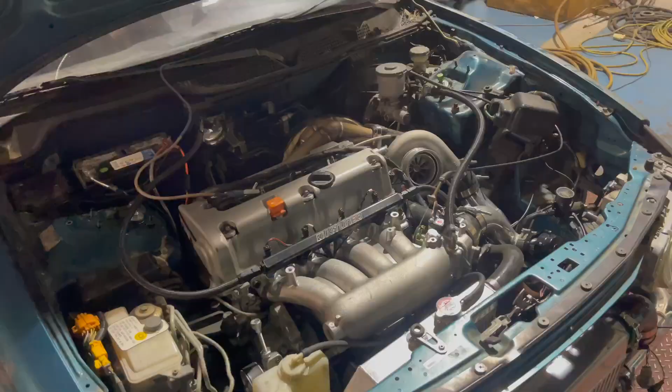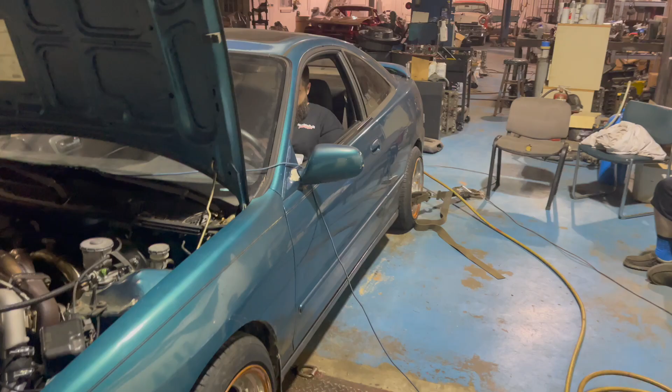It does have pistons and rods that we put on the 85. It has a Bull Boost turbo, 1300cc injectors, Walbro 450 in-tank. Like I said, the rest of it's my budget turbo kit: intercooler, downpipe, manifold, wastegate, charge piping. Chris built the motor and assembled the car. I just built the turbo kit and he's gonna be on the dyno.

And then we got Stumpy over here with his popping-out-second-gear transmission, and we're gonna be dynoing that. And we're gonna finally put Milkshake on the dyno.

So as every car gets on the dyno, I'll be talking about what car has what, and every motor's pretty much set up different. Milkshake and the Integra both have built K20 motors. Stumpy has a stock K24 in there, on a Jack Spania 3584 RS.

Milkshake's on a... what the hell is that turbo? VS 6870. So we're gonna be trying that turbo out. It drives really damn good on the street, the car almost feels like a motor car. This turbo is a Bull Boost turbo.

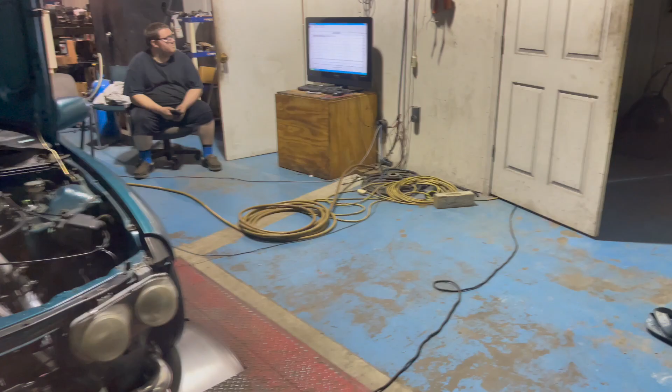Got a little bit lit there at the end. It must sound like a little creep at the top.

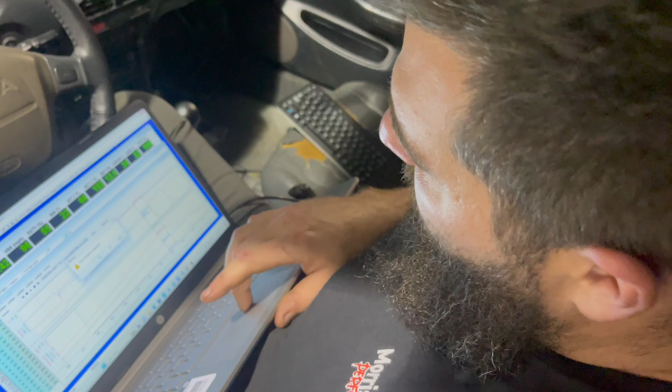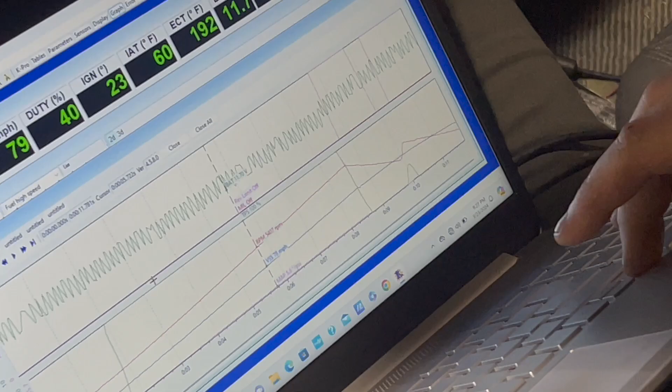Chris, explain to everyone what's going on. Bro, let's talk about it. Voltage. What is that, like your heartbeat? Oh no, you're alive. You fucks.

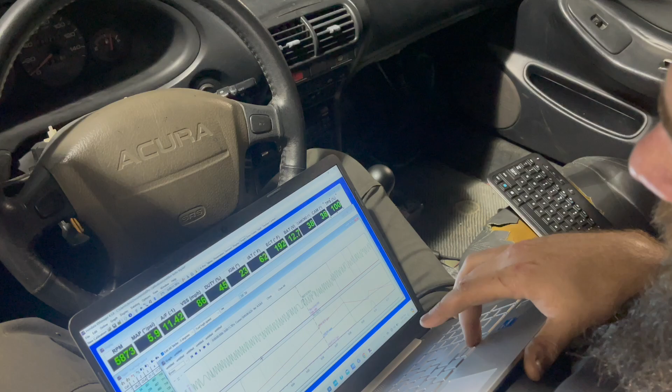Everything else looked good, but voltage is slowly starting to tank on us. So either alternator — I'm hoping not ECU. I feel like wiring's fine, it didn't do this before. So possibly alternator. Yeah, so that's the second tune that I don't get to do, and this is a full build by me, so I wanted to make power.

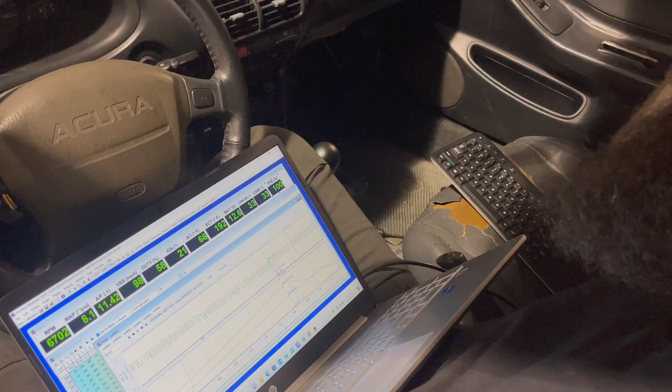Sometimes you'll have that on the big jobs. Yeah, so I'm striking out again.

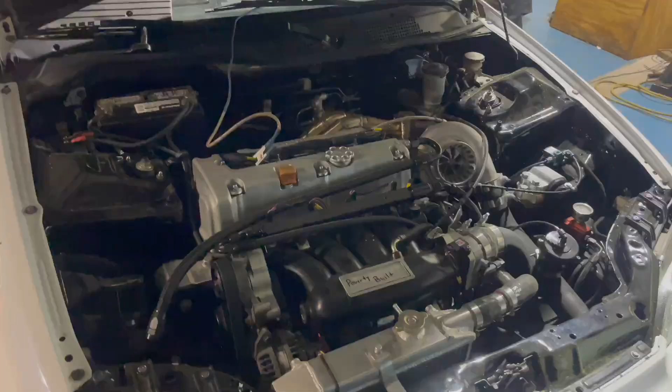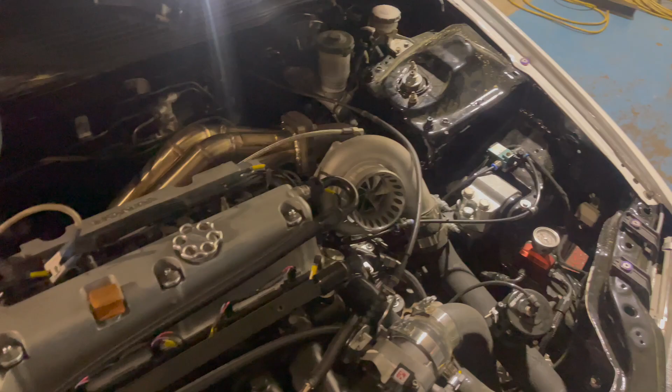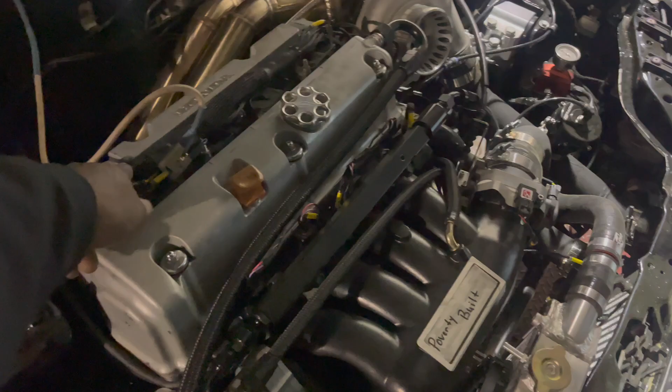Oh, action clutch, element trans. Still got CRV diff in the rear. We just gotta hook the driveshaft up after we get up on the dyno, and that's it. So let's get to tuning.

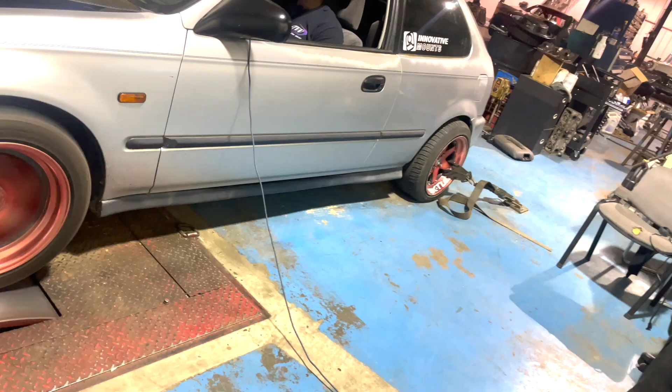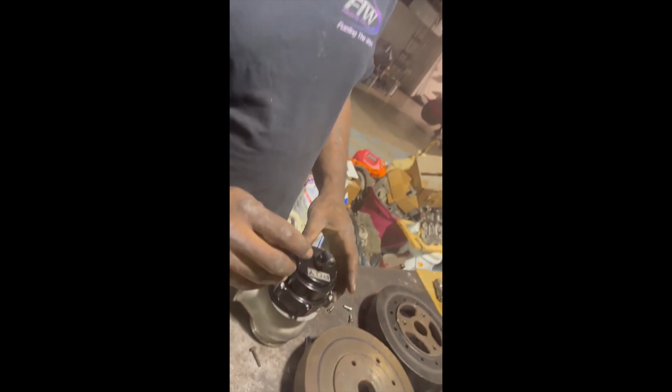We got Stumpy on the dyno. We got Phil over here. What you doing, guy? Stumpy tried to save $40, and it's costing us time.

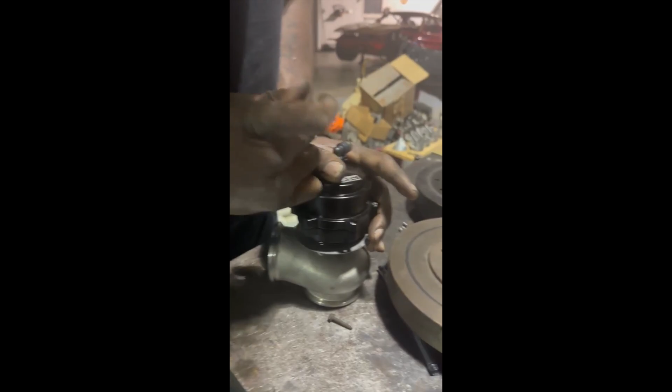It's a PQI wastegate that doesn't work. What was going on, how was it not working? You're about to see, we're about to show the people. He's gonna walk over there to a trash can and just let it fall, after he gets the fittings off.

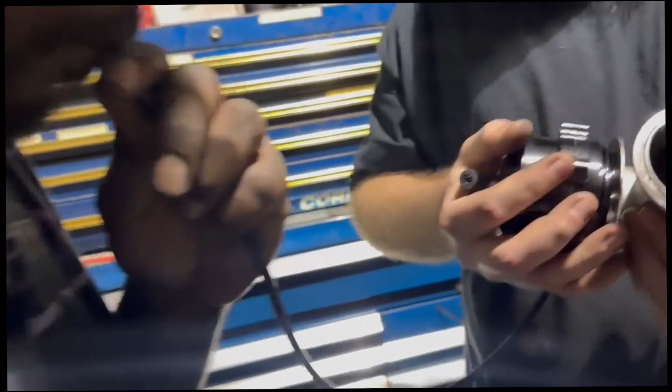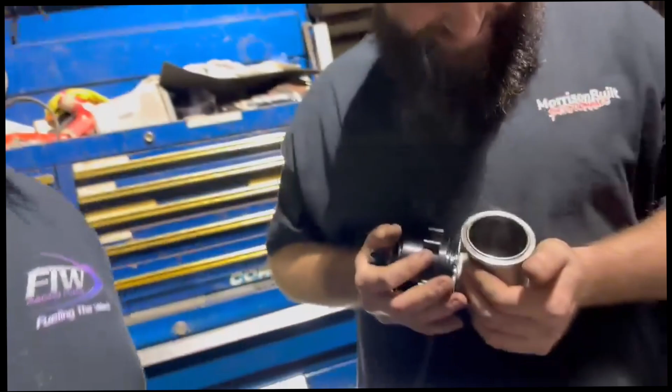Are you recording this in landscape and not... Just stop it, we gotta test out this gate we got here. There we go. Got a vape trick. Oh no. Smoke test. $22 smoke tester, that's terrible.

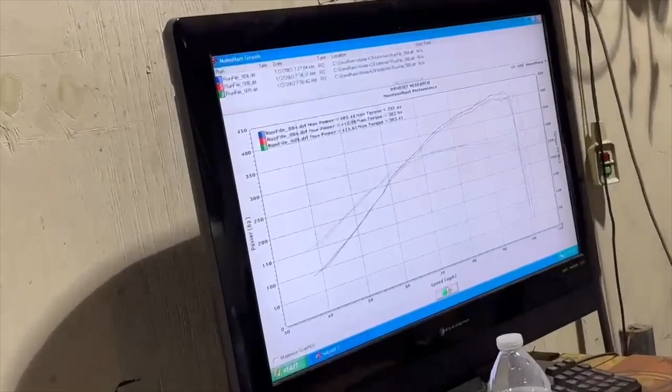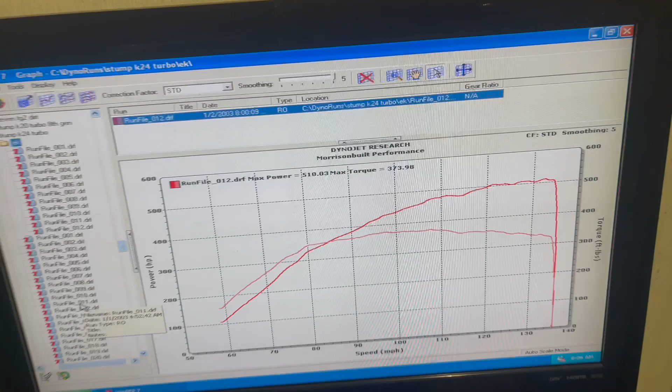All right guys, so we got done with Stumpy's car. Final numbers are 510 on 17 pounds. This is a fourth gear pull. How the hell is it going 135 in fourth?

So you sure this is an EK? Nah, you sure it's not an EP3 trans? Small tire, 195, bro. Oh, I mean yeah, I guess we'll just find out when we go to the track.

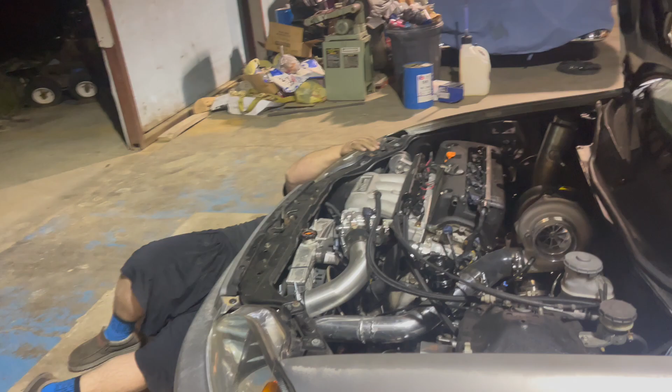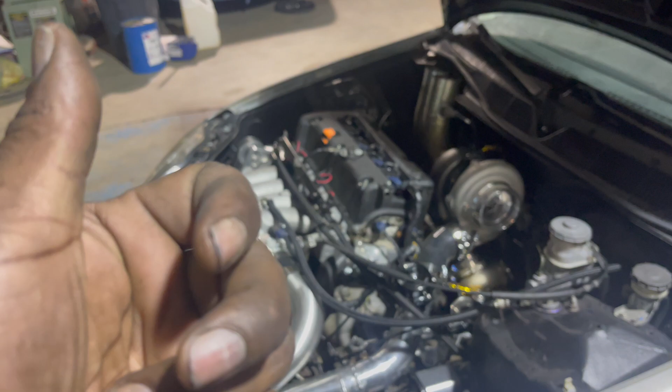But it's 1:40 in the morning, we're about to close up and head back to the shop. 24 and a half should go up, 150 at the back. Yeah, we're not going to sleep tonight. We still got to put the traction bar on — bolt it in — and the rack and pinion, so we don't die tomorrow at the track. And that should be it.

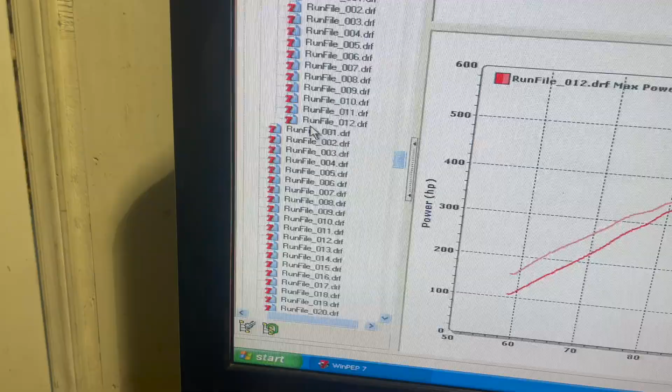Milkshake made 574, but we're out of fuel pump, so we're going to put a Magna Fuel 750 on it. K-Power all-wheel drive, 562 is what it made, and that was on like 24 pounds.

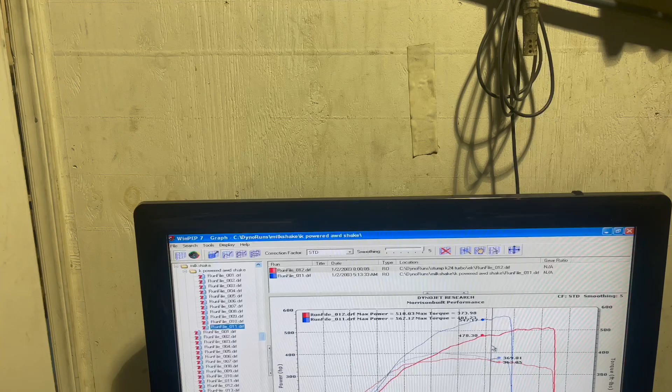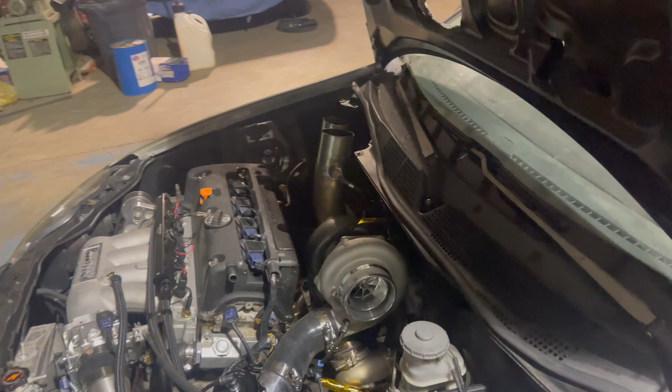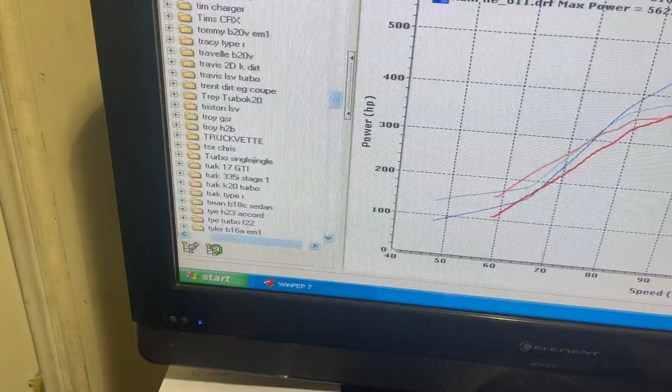So that 6870 is comparable to like a next-gen 6266. Do the Jack Spania, bro. This Jack Spania turbo is pretty good, it's comparable to the VS 6762, because that all-wheel-drive CRX that I did, compared to my old graph — is that still the same one? No, that's an LSV turbo, my old car had a 67 on it.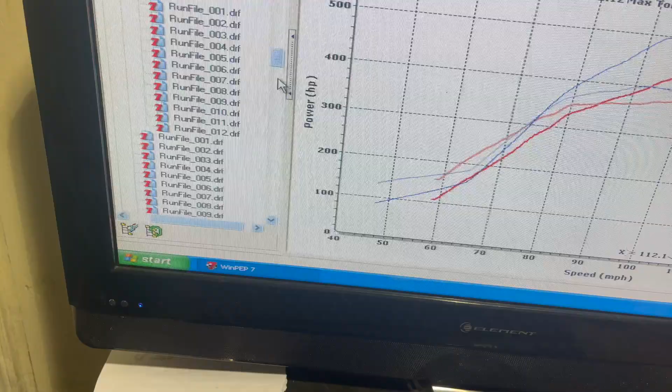Yeah, Stumpy's K24 turbo, it's like fire and runs like 15. I don't know what — it's probably somewhere in there. Well, no, a little bit further down then. That's 490, that's 581.

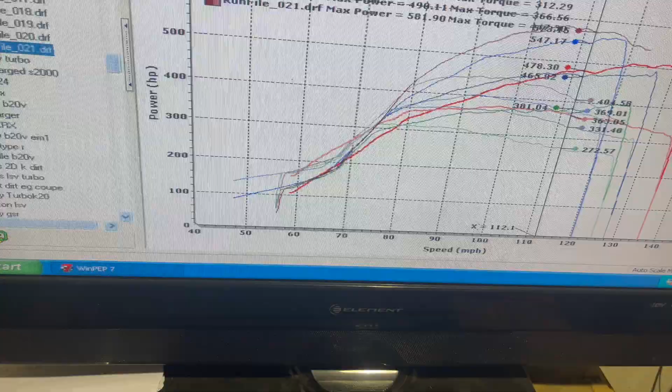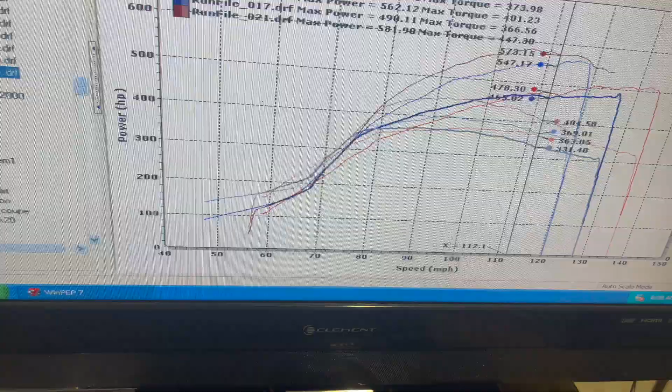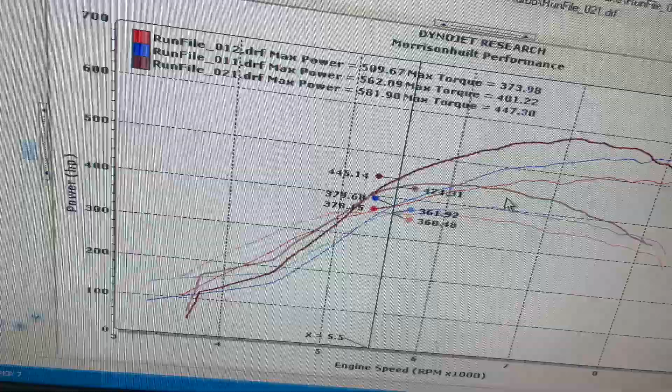So that's Milkshake. This is Stumpy's old 67-62 VS Racing turbo on his old K24 — that motor was a 0405 motor and it had an EP3 transmission in it. Let me see if it'll show engine speed clean. That car was on like 27 pounds, so his car right now is on 17 pounds, so you guys can see the comparison.

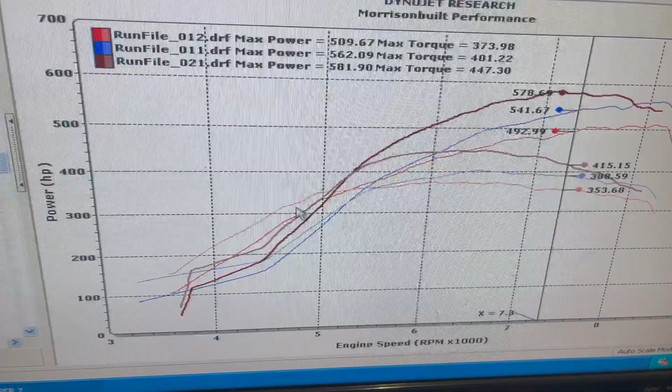So I'd rather put a 67-62 on Milkshake, but I can also manipulate this with quick spool. I had the quick spool turned down and wasn't really doing anything with it, and I was also still playing with the fuel. But yeah, all in all, good day on the dyno for me.

Not so much my guy right here, because he can't damn make power for shit. Customer supplied parts, two times — two turbo K cars just fucking teasing me, teasing this man. This man just wants to make power on the RSX. We got the same power, Milkshake, and bro, you get got. Oh my god, I ain't trying to be that guy. It ain't gonna happen, Captain.